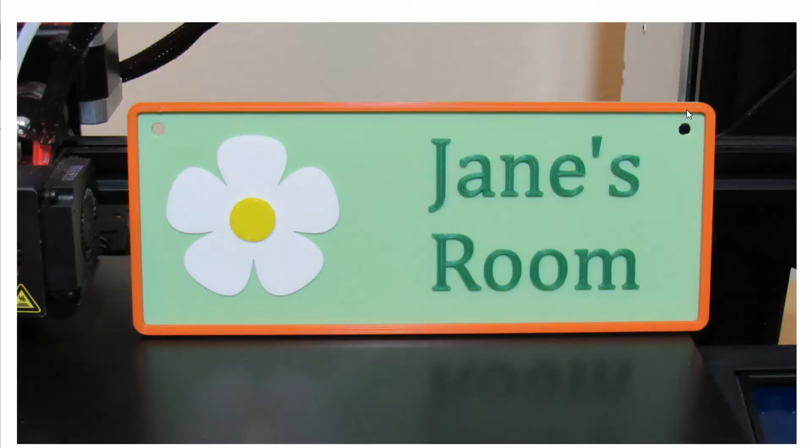Before we get into the lesson, let's do a quick review of the support blocker technique we've been working on. When we look at the nameplate, we see 5 different sections we may want to print in different colors: the backplate, the bottom section of the flower, the center piece of the flower, the text, and the frame. What we did by creating all those erasers was to gain control of what we wanted to print each time.

So we just had to simply move an eraser higher, exposing the part or parts we wanted printed, and created the G-code for that specific print.

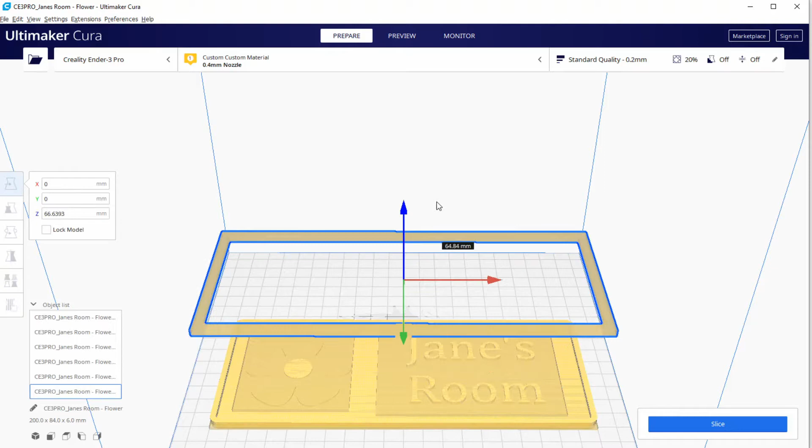Then we'll put the eraser back to its blocking position and move the eraser of the next part that we wanted to print.

And don't forget that we also had to move the models to create the interference to promote adhesion between the backplate and the upper sections.

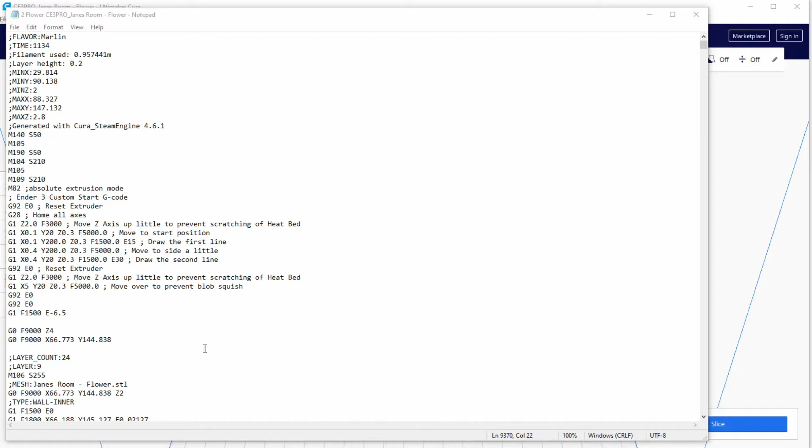The final step for printing was the minor edits to the G-codes to keep the bed hot and to avoid crashes.

Let's get started with this lesson.

I showed this nameplate to my Aunt Claire, and she really liked it and asked me if I could make one for her just like it but with a few minor changes. Instead of saying Jane's room, she wants it to say gardening tools, with no holes. I guess she's going to glue it to the closet where she keeps her gardening tools.

For colors, she wants the nameplate to be red, including the frame. The flower, she wants the petals pink with an orange or yellow center, and the text white.

So what do we do if we don't have the original design to make the changes? Let's see if we can make it with what we have.

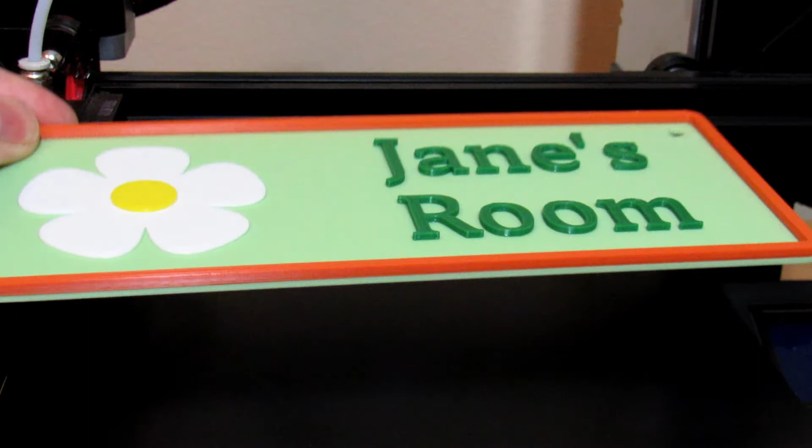We have the model of the nameplate with the flower from the last lesson. We learned how to block the text from the original nameplate. We even have some G-codes already from the previous print. So we only need to find a way to get the new text, gardening tools, onto the nameplate. And if the frame and backplate are of the same color, why don't we print it as a single piece?

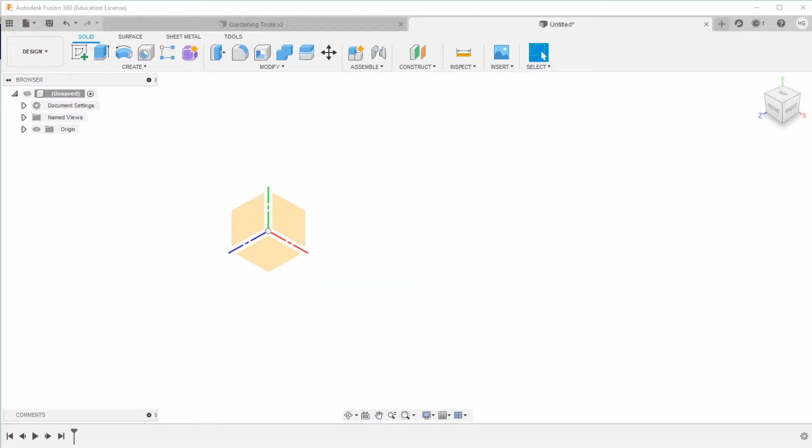Let's start by opening the 3D modeling software. I use Fusion, but Tinkercad works just fine for this.

Let's create a rectangle that is 30 millimeters by 70 millimeters and make it 2 millimeters thick.

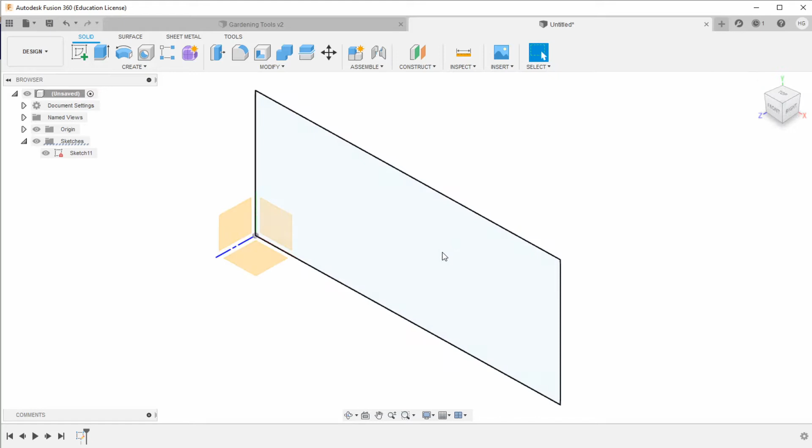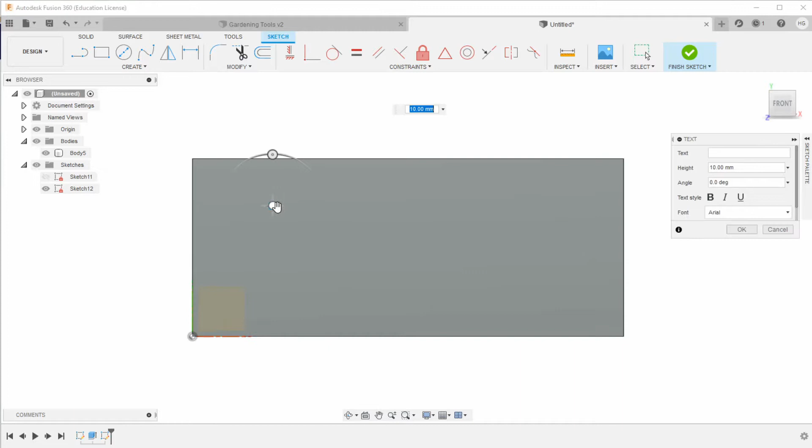On the rectangle, insert the text gardening tools in 2 lines. Pick a font and a size that you like. For this I chose the font Lucida Calligraphy at height 10 millimeters. The size is not as important because we can adjust it in Cura. What is important is that the line spacing looks good and that the bottom line is centered with the top line.

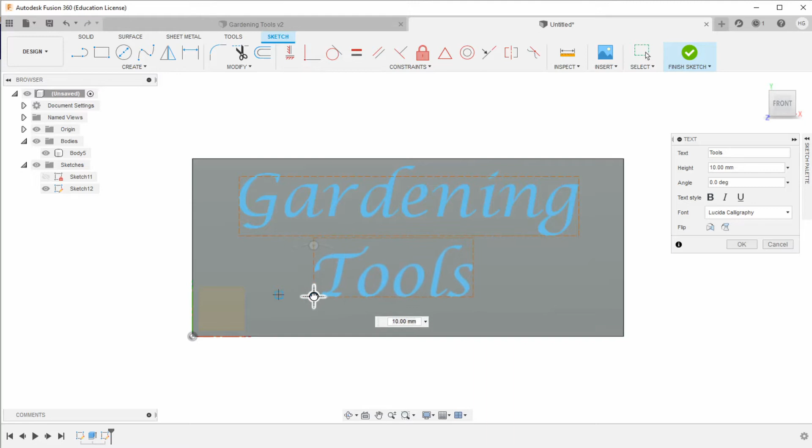Make the text 10 millimeters tall.

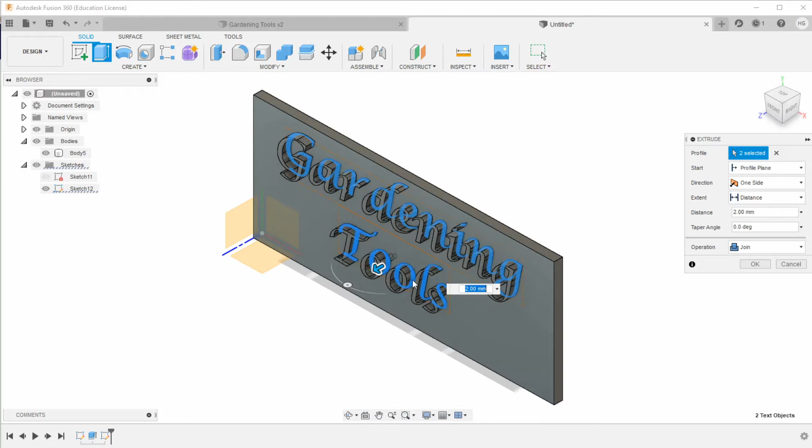Save your design and export it as an STL.

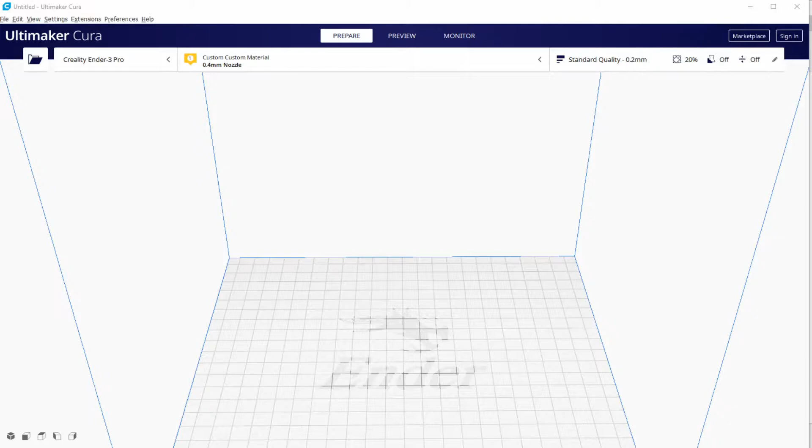Now we open Cura and load the nameplate model from the last lesson. Once it loads, also load the gardening tools STL. We're not printing the nameplate model here, but using it as a guide to place the gardening tools text on the build plate.

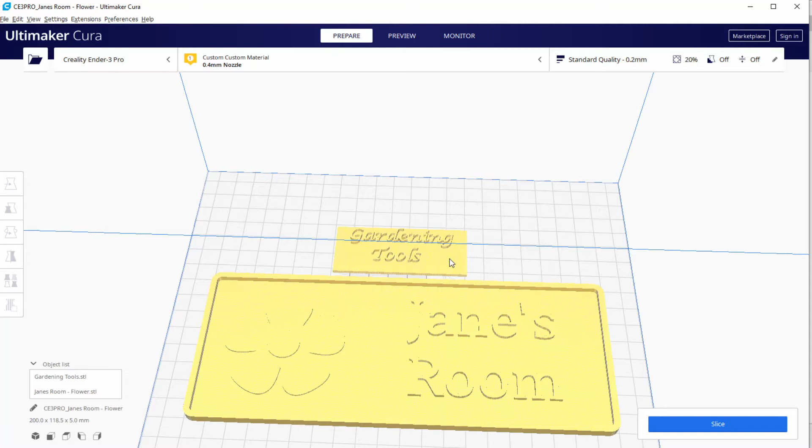Select the gardening tools model and move it on top of the nameplate and align it with the text. I think it is centered, but there is room to increase its size a little bit. Select scale and make sure uniform scaling is selected. Increase the size until it looks right and move it if necessary.

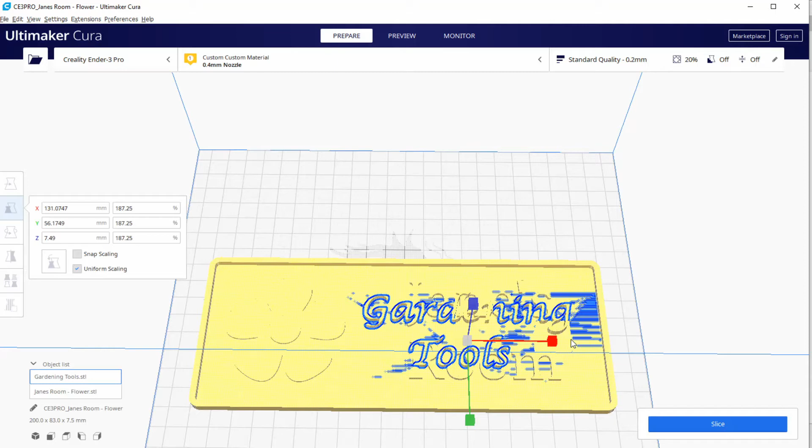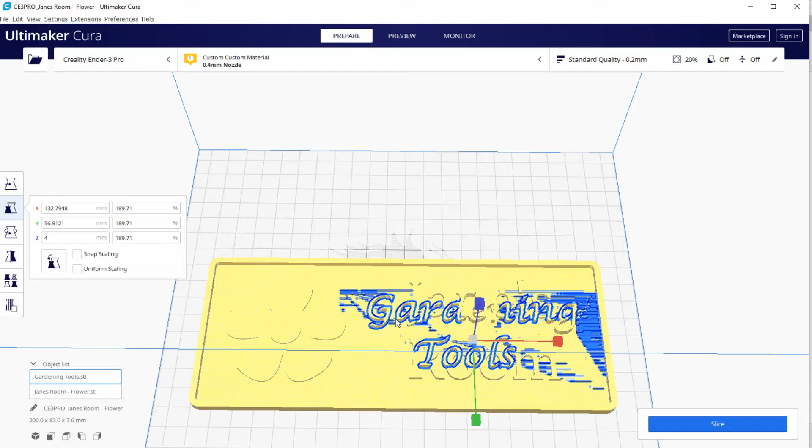That looks just about right. Now, uncheck uniform scaling and make Z4 to get back to the correct height. On move, confirm that Z is 0.

We run the slicer to see if it is in the correct place. Yes, it looks like it is centered.

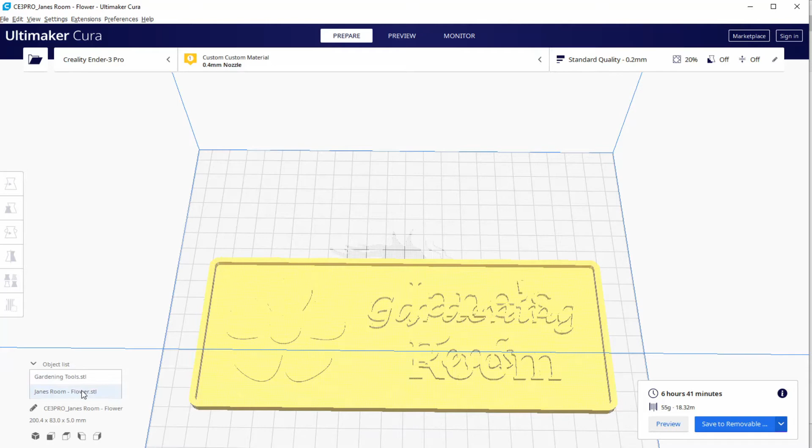Now select the nameplate model and delete it. We're left only with the gardening tools model, and it is at the correct location on the build plate.

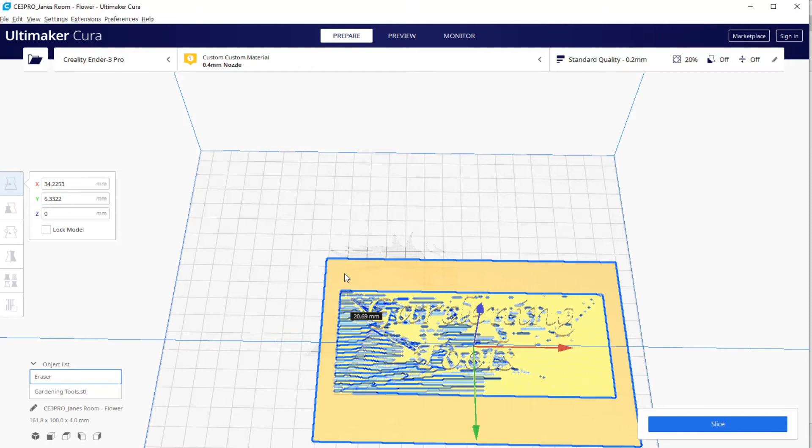We're going to print this text onto the nameplate, so we have to lower the model 0.2 millimeters, just like last time.

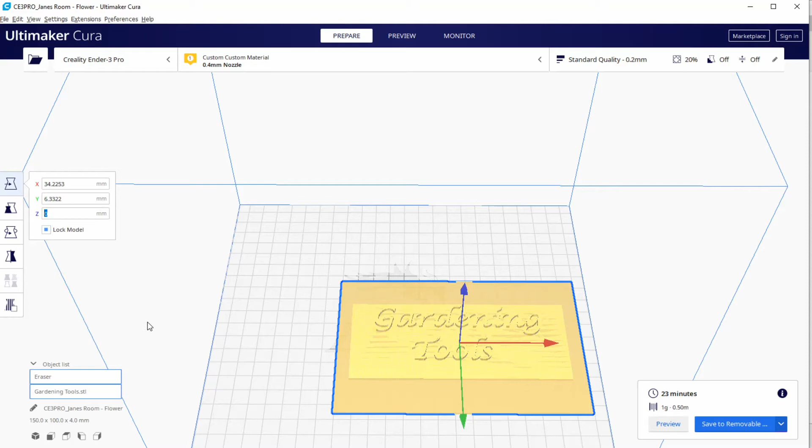Let's slice it, and you should see only 10 layers. Save the G-code to the SD card and rename it Gardening Tools.

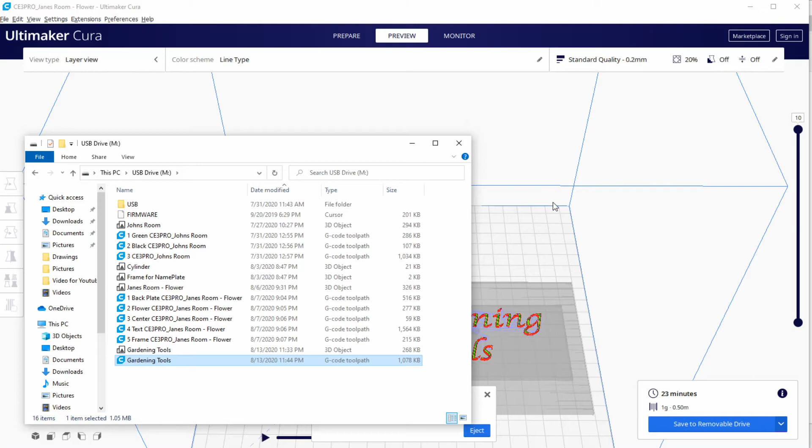Clear the build plate and load the project from the previous lesson. We're only going to generate the G-code for the backplate with the frame.

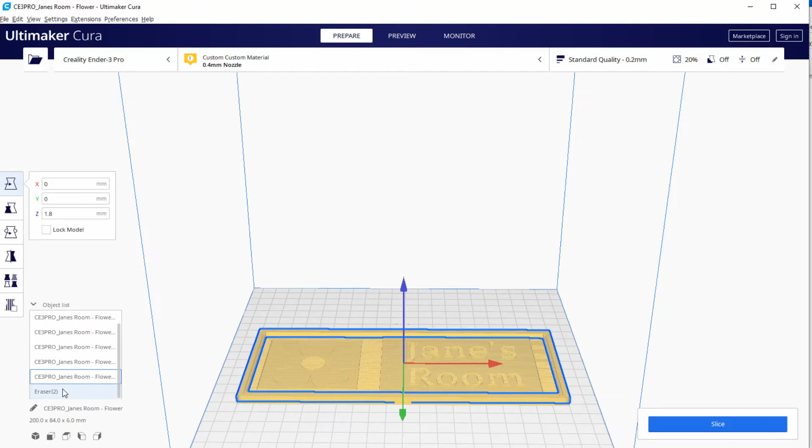So let's move the models to their original heights. Unfortunately, Cura renames the objects, so we'll have to go one by one to see what each model is before we can move it to the correct height.

Find the backplate and move it to Z0. Find the big eraser and move it to Z80 to get it out of the way.

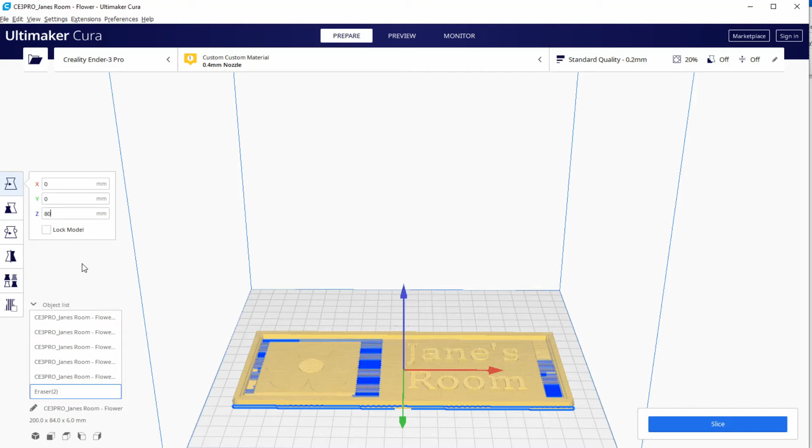Find the frame eraser and move it to Z90.

Find the cylinder erasers and move them to Z100.

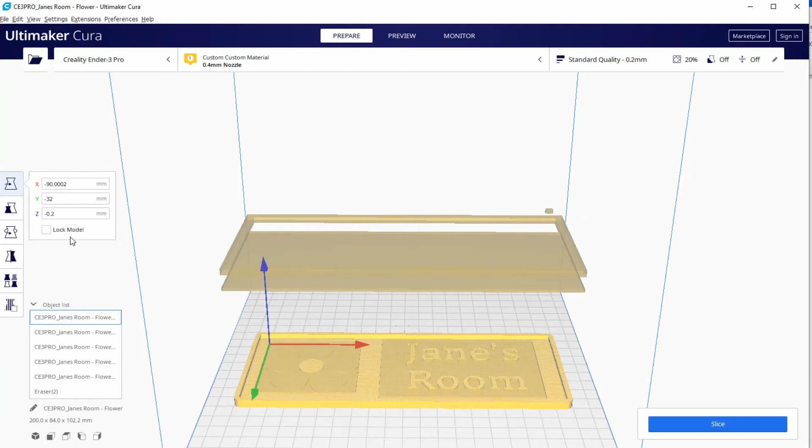Find the eraser for the text and move it to Z2. Find the eraser for the flower and move it to Z2.

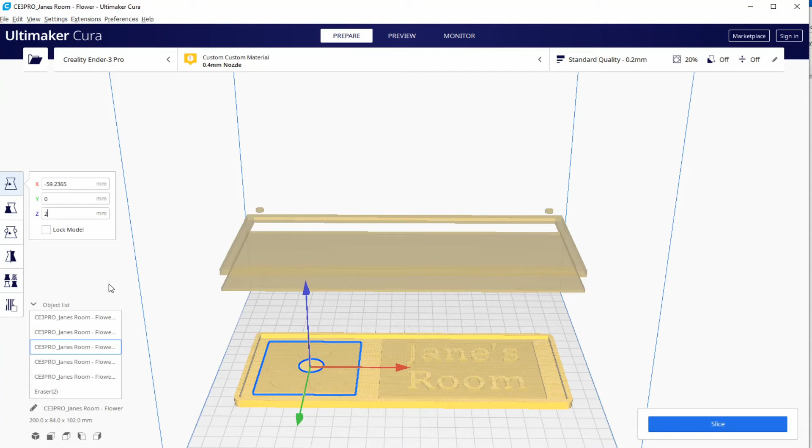Let's slice it and see that only the back plate with the frame is printing with 25 layers. Save it to the SD card and rename it back plate.

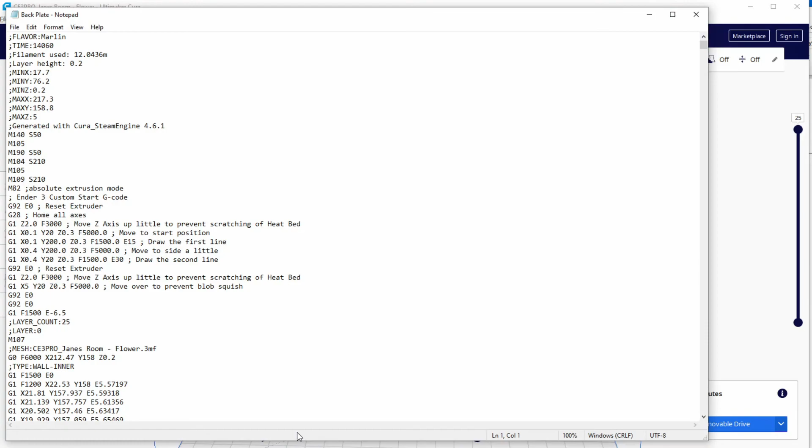Now we're ready for the G-code. Let's open in Notepad the G-code for the backplate that we just saved. We only need to add the semicolon to the M140 instructions to keep the bed hot between prints.

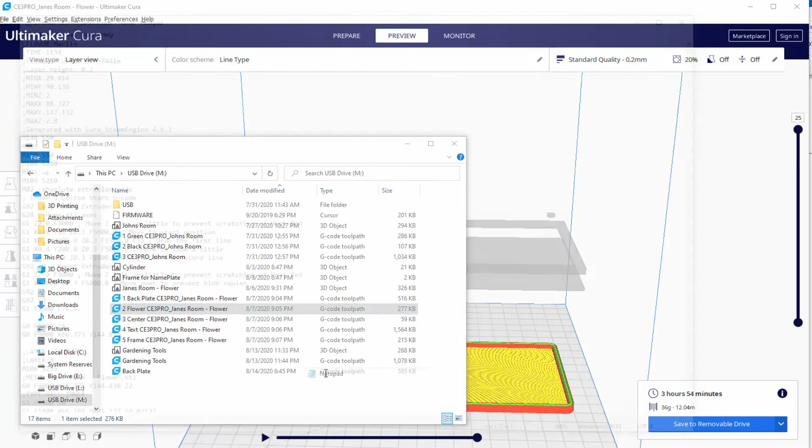Open in Notepad G-code 2 flower from the last lesson. The only change we need to make to this G-code is to increase the height to avoid crashing with the frame that wasn't there last time.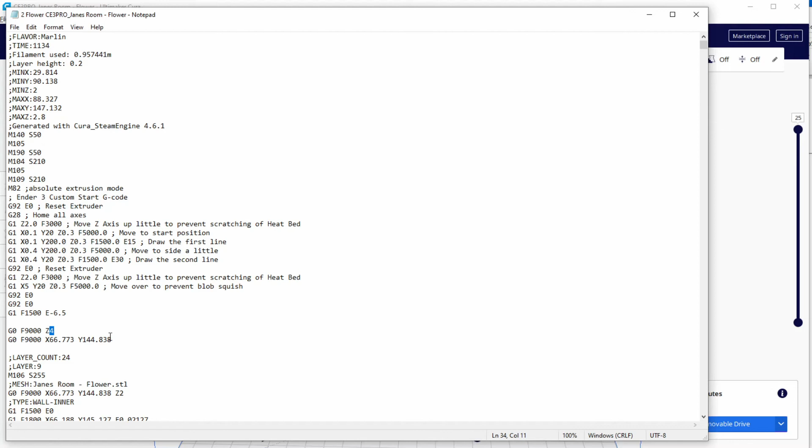The frame height is 5 millimeters. So let's change the Z4 to Z7 to be sure that we have plenty of room to avoid the crash.

Let's do the same change to G-code 3 center.

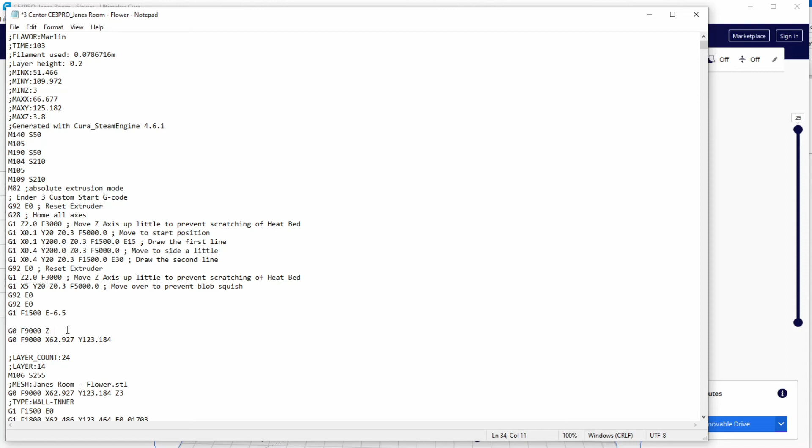Now we edit the G-code for the gardening tools text and add the crash avoidance instructions with a Z7. We don't do anything with the M140 because this is the last print.

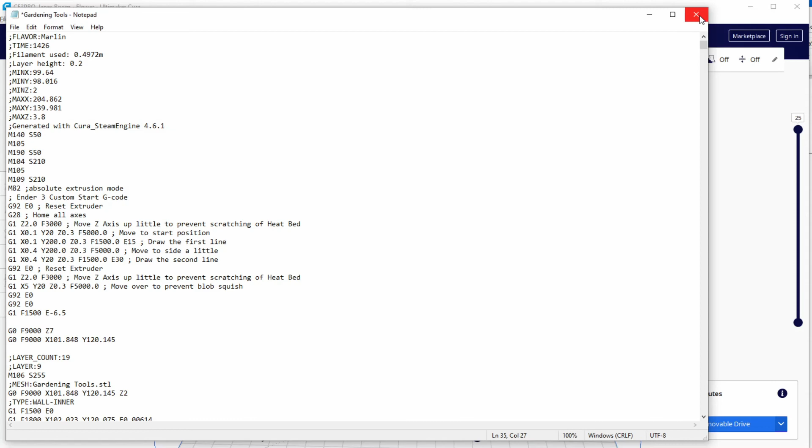Excellent. We're done editing G-codes. Let's print them. The first print of the backplate with the frame looks okay.

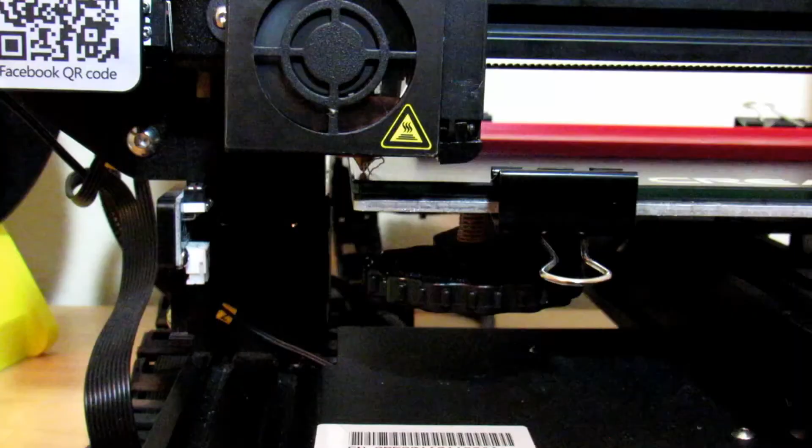Let's see if we can go over the frame and down to print the flower without crashing. It worked. This opens up a whole new set of ideas for future projects.

Now let's print the center of the flower.

And for the final print, let's see if it prints the gardening tools text.

Well, it came out very nice. You know, the color combination looks better than I expected. I'm sure my Aunt Claire is going to be pleased.

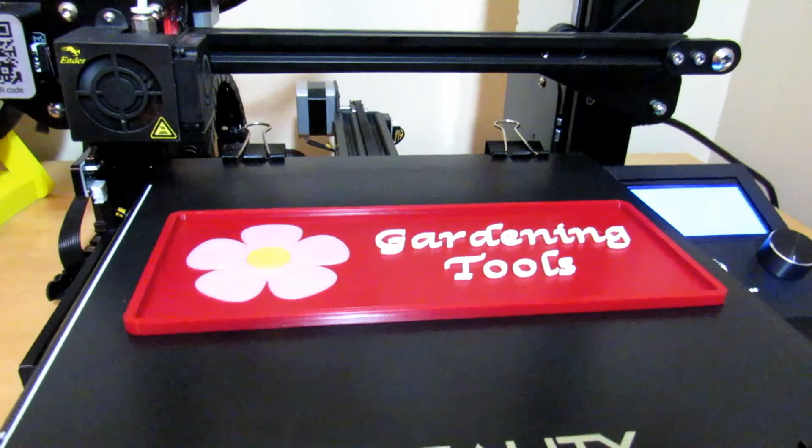I hope you enjoyed these lessons as much as I did. For this lesson, we mixed models and G-codes from different projects. We also modified the G-codes, and the end result was a very nice print.